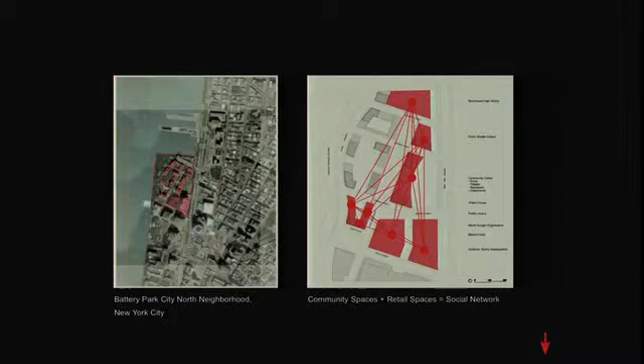which we refer to as woven fabric. This is a project that we designed in conversation with the clients to consciously change the way that we conceive parks in the city of New York from being part of a grid to being a woven fabric that moved through space. We also looked at the effect of renewable energy resources on design at Battery Park City.

We decided to design the North Neighborhood as a sustainable energy network. The decision was taken early on that we would apply every known sustainable technology that was in existence to every building, every park, and every sidewalk that we put into the neighborhood.

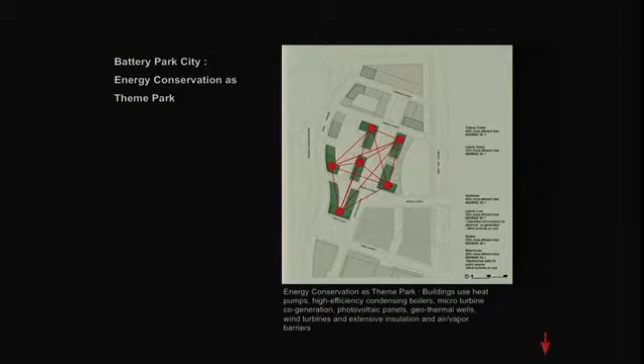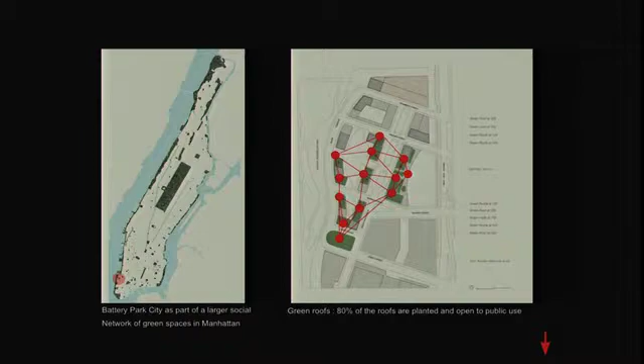I'm showing a map of Manhattan that shows all of the green spaces in the parks, and the little red dot is the North Neighborhood. Next to that, I'm showing a diagram of Battery Park City, which shows where the green roofs are that we put in the North Neighborhood. This is a diagram isometric that we drew that shows all of the various green roofs at Battery Park City in relationship to the massing of the buildings next to a parks diagram.

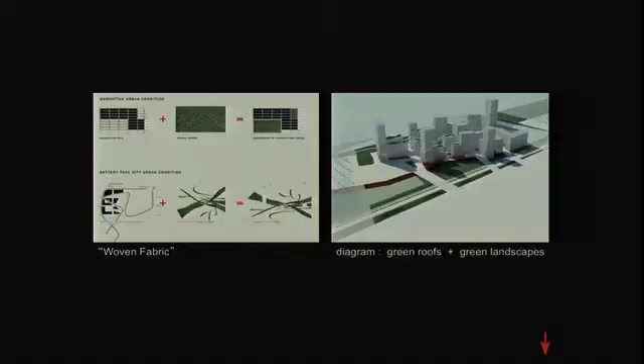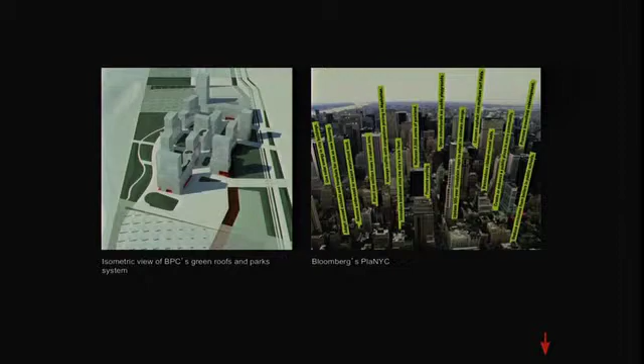This is a diagram by the PlaNYC people. Bloomberg actually came to Battery Park City and met with us and reviewed with us the various kinds of changes that we were making to parks and other systems, and wanted to apply those same sorts of systems to the city of New York. So you can see in the diagram, green streets, the kinds of flowing park systems are all part of the PlaNYC.

Another part of PlaNYC is to plant 1 million trees in the 5 boroughs of Manhattan, and also to bring green streets to New York. This is Battery Park City's North End Avenue, one of our streets, which is a green street.

Another change that I see happening in architecture is globalization. I'm showing the Irish Hunger Memorial, which is at Battery Park City's North Neighborhood. This is a project that was built after HMA wrote a competition brief, which was put out to artists around the world. Brian Tolle won the competition, and his idea was to transplant a piece of the Irish landscape to Manhattan.

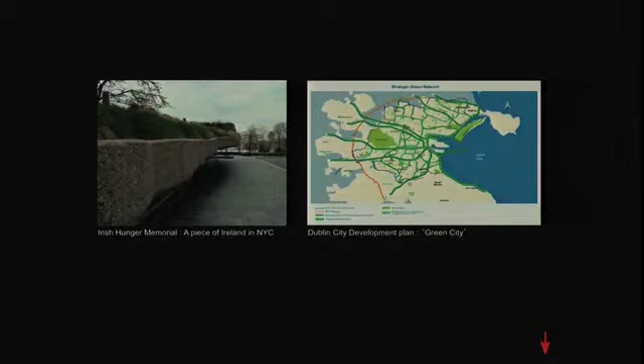Next to that, I'm showing a plan of Dublin. The city planners in Dublin actually came to Battery Park City and met with us to talk about the different kinds of green technologies we were applying there, to develop their plan for the future of the city of Dublin. So this is what I mean by globalization, this incredible rapid exchange that's happening.

Weather, I think, is an enormous driver of change. When you look at weather and global warming, it's been really pushing all of these green movements forward. I think it's being fed by the incredible changes we're all experiencing related to human occupation, deforestation, and carbon footprint.

Plus, very much like Gail Collins, whenever I give a lecture and talk about things, I always talk about Vitruvius, very much the same way that she brings up Mitt Romney's dog.

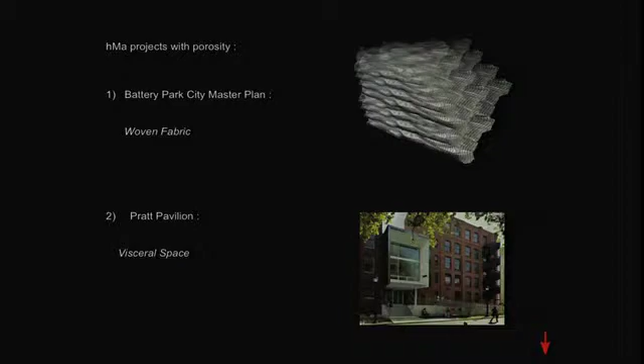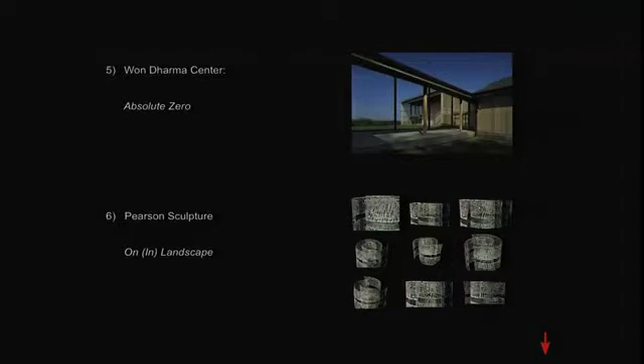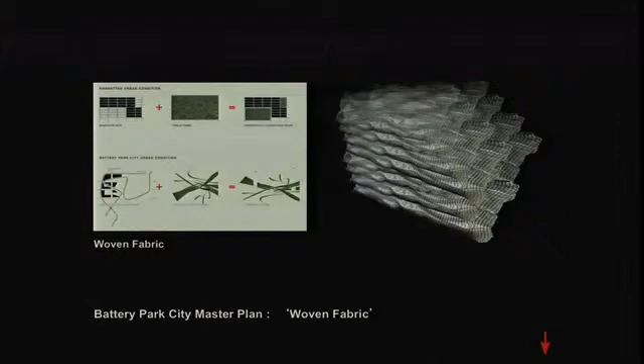So we'll go back to the Battery Park City Master Plan, where we created this woven fabric diagram. This is really where we started with the client, with this discussion of changing the concept of what a city park is and how it should operate within the city.

The way Battery Park City happened is that when the World Trade Centers were originally constructed in the 60s, there was a lot of earth and debris from where they dug up for the foundations. So the city decided to take that debris and put it into an area of piers across the street from the World Trade Center towers, and that landfill area became Battery Park City.

When we pitched to get the job at Battery Park City, there was another architect who was a master plan architect, but he had never made a physical model for the client. And this is how we got this job—we made a model. So I think you should all think about that for your future.

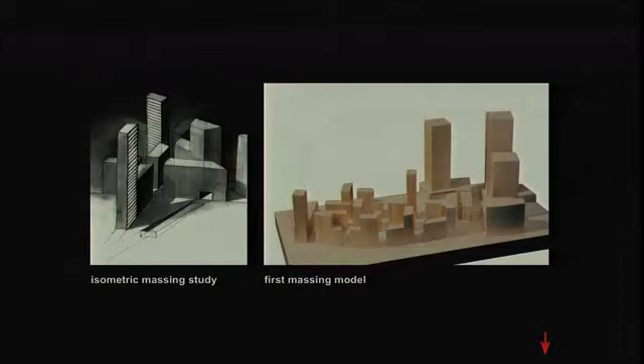This is our green roofs and green landscapes diagram. The red line you see going through the plan is North End Avenue, which is the organizational spine of the landscape down there. As you go down the street from north to south, you go through a series of parks. You start at a dog park at the north end of North End Avenue, then come to the ball field terrace, which is a green roof over the building we're doing at DWIP. Next to DWIP is a field of green, which is the ball fields.

Then across from us is Teardrop Park. South end of North End Avenue is the Irish Hunger Memorial. And west of that is Nelson Rockefeller Park.

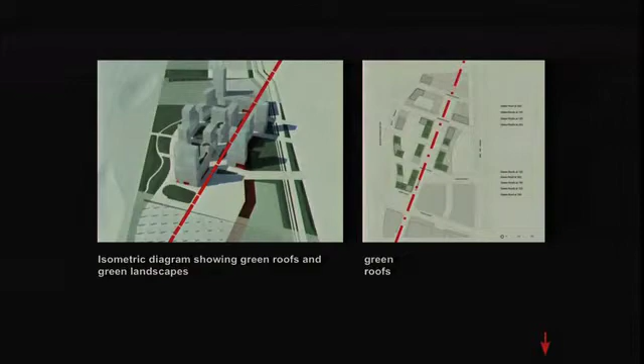So this, again, talks about how we looked at it as a weave. It shows some of our park spaces. And here we are looking at North End Avenue as a green street.

I've talked quite a bit with students here about green streets. Green streets is very much like LEED. If you design a green street, there's a whole application process you go through. And if your street is certified as a green street, you actually get a little plaque that goes on your street, just like you do for a LEED certified building. It's an actual designation of a certain level of green qualities, a certain amount of water retention that your street possesses.

Parks that we have at Battery Park City—this is Nelson Rockefeller Park. It is the west side of the North neighborhood along the river. The Irish Hunger Memorial shows the Irish landscape looking inside the memorial.

This is Teardrop Park. This is a park that we collaborated on with Michael Van Valkenburgh, and the concept was to recreate an original Manhattan landscape by bringing massive rocks to New York City from upstate New York. This is a bird's eye view that gives you a sense of how lush and green it is.

This is a drinking fountain. Everything in the park was custom designed. This is another bird's eye view. Another thing we worked on for Teardrop was, because it's very much an enclosed park with towers all around it, we put three heliostats on the roof of one of the buildings so they could move through the park. They're on timers so that every plant gets enough sunlight to stay healthy.

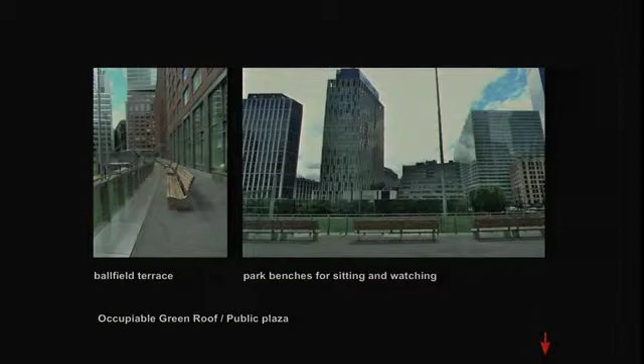This is a bird's eye view of the ball fields and the ball fields terrace. This is actually the green roof of the building that we did, DWIP. It's a series of ramps and staircases and benches that go into the landscape.

And this is the view when you're at Battery Park City's North neighborhood on September 11th, when we had the tribute in light across the street.

So I'm going to change gears and go from Manhattan to Brooklyn. This is a pavilion that we did at Pratt Institute called Visceral Space. It's a deformed rectangular box that we designed to fit between two existing industrial loft buildings, Steuben Hall and Pratt Studios. It also floats between two green spaces, a courtyard that we designed behind the building and the campus in front. Our original proposal was just to place this very simple deformed rectangular cube in the slot between these two buildings, and there were various issues that came up in the process.

The first issue we faced was one I'm going to call 'buildings face out, not in.' When the Pratt campus was started, the area you see in the middle of the campus, the campus green, didn't exist. There was actually a street that ran through the campus, and there was a trolley on that street, so all the buildings were originally designed to face the outer streets. About 75 years ago, the Pratt family decided to change that to actually make a campus, but they didn't change the way people entered the buildings at that time. So this was the first step in making that change, so that people entered the buildings from the campus side.

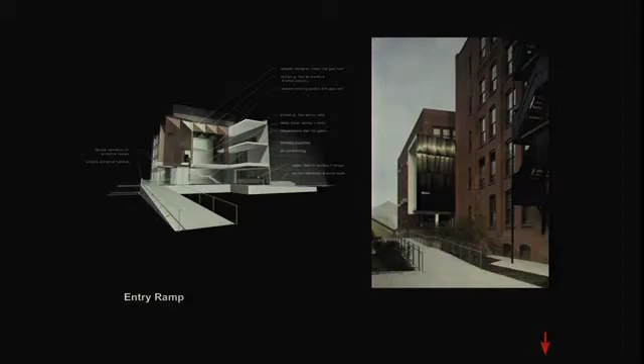Another issue was the handicap ramp, which is usually a problem for architects because they're so long. But in this case, we decided we really wanted that length, because we thought we'd use that really long white concrete ramp to underline our pavilion and help pop it out.

We also wanted to make a really nice public entry. We created this entry where we left the walls from the original buildings in their raw state, unfixed, just as they were, very rough. This shows what the entry is like, and next to that is a slide of what that same space looked like when we started—just the crack between two buildings, with a courtyard that was full of debris.

We also thought it was important to make a nice public staircase. Pratt Institute is a school that prides itself on being a place for people to study things like industrial design and many of the design arts, so we felt it was important to make a stair that was handmade, with a sense of tactility. So we made this steel stair that was hand-welded and created for the space.

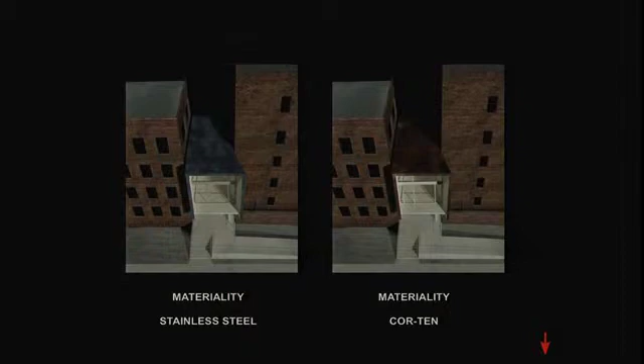We also studied materiality, as we often do with our projects. We definitely wanted the pavilion to be steel, but we didn't know if we wanted Cor-ten or stainless, so we decided at the end of the day to go with stainless steel. We also studied one of the other things we're asking students to do in thesis, which is precedents.

One of the precedents we looked at was this sculpture by Menashe Kadishman, suspended at Storm King Art Center in upstate New York, because we wanted to get that sense of tension you feel when standing under a weighted object. Another precedent, which happened after the fact, is this piece by Michael Heizer in Los Angeles, his Levitated Mass.

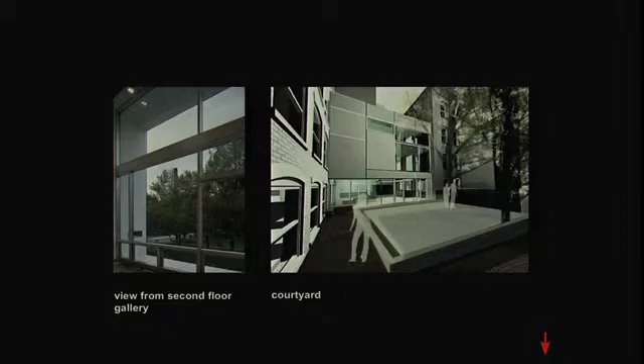There are also the other two edges to the space. There's a campus green on one side, and a courtyard on the other. So when you're in the gallery, you can always look out and see the campus, and behind you there's this courtyard that we designed. This is a perspective rendering of the courtyard, and this shows the campus and what our courtyard ended up looking like, always giving you a way of looking at the campus or the courtyard to know where you are in the building.

This is my last slide of Pratt. Just to give a sense of what it's like to stand under that box and look up at the sky, so you sense this building as a complete object or vessel, which we thought was important for Pratt Institute—that you pass beneath this visceral vessel, crafted with a certain sense of care, like a beautiful machine.

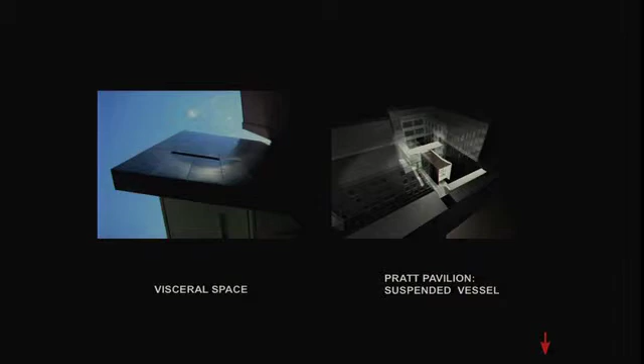So I want to switch gears and talk about a residential project. This is actually the only residential project we've done in the past few years. It's Holley Loft. This is a client we had originally designed the loft for in 1996. It was selected for a show at MoMA called the Un-Private House. Two years ago, we demolished the project and did another renovation of the space. The client felt he needed to move on, and I kind of agree.

It's an interesting difference—the original space cost $90 a square foot, and it was put together by friends of mine. The new space cost about $800 a square foot. So it was pretty much a white space.

I wanted to create these two wood boxes that gave you orientation, so you entered into the smaller box, which is the elevator lobby, and across from that was another wood box, which was a study. For me, these were kind of like this violin I'm showing by Robert Lazzarini, a New York artist, floating on the white wall of a museum—it becomes this object that gives a sense of materiality within a white space.

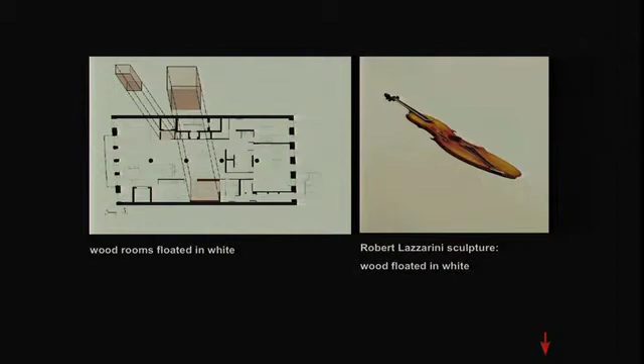These are sketches I gave the client as we went through the process, talking to him about how I wanted these two boxes. What you'll notice in the photographs is that I don't have great shots of this space, unfortunately, because we didn't want to shoot it once the furniture went in—the furniture is, quite frankly, horrible. So I apologize, but what I have are shots showing it unfurnished.

This is the living room space, looking back toward the bedrooms. This looks at that entry elevator lobby, and another view looking at the lobby. I wanted to crack that space so you got a sense of the wood from the living room. As you can see, we put in a whole new concrete floor.

This is standing in the study, looking back at the elevator. And this is inside the study—all the walls are wood, the ceiling is wood, looking back toward the living room.

In addition to the two wood boxes, there are also these three glass boxes, which for me were a little bit like this ice wall by Michael Van Valkenburgh at Radcliffe—you had these three glass boxes that you had to walk through to get from the living space to the bedroom space.

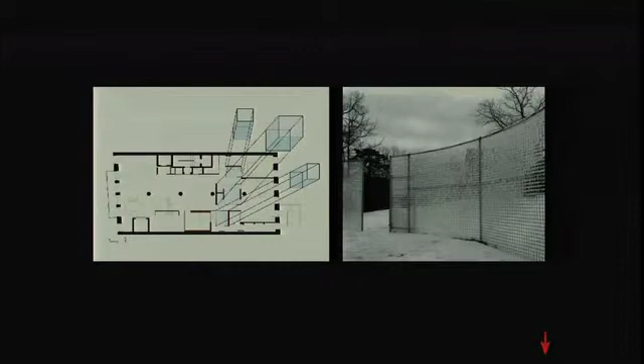So this is what it looks like when you're in the living room and you look back at the private spaces through those glass boxes. And this is the view you get in the bedroom looking back at the living space.

For me, the glass boxes were kind of like this anamorphic box. I designed this anamorphic box for a friend of mine, Michael Schumacher, a composer I've collaborated with for about 15 years. I feel Michael's sound pieces are very flattened pieces of music, so I felt this anamorphic cube, which is very flattened, was very appropriate for his music.

Next to that is a shot of one of the bathrooms. And this is back in the living room space, looking at the bedroom area, the kitchen, the living room, looking at the study, standing in the master bath looking at the master bedroom, and in the bedroom looking toward the living room and the bedroom. This is in the master bath and in the bedroom.

This is a shot I think is very interesting - standing in the master bedroom, looking back toward the study, because the door to the study is kind of like the anamorphic box. It has two ways of being: when it's open, it's solid wood, and when it's shut, it's completely white. So it has two faces and two ways of being.

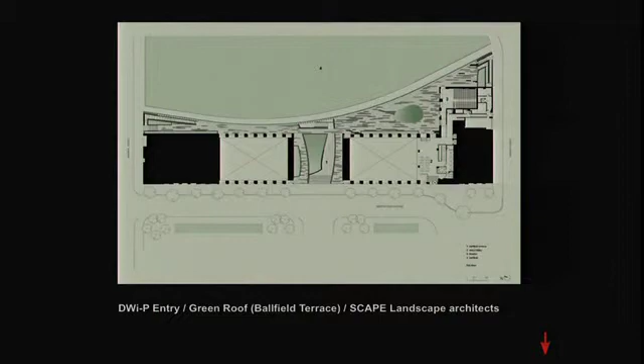The design process again - we make a lot of physical models. This is a physical model we made, and we also make a lot of rendered drawings, partly for our clients so they know what we're doing, and also partly for ourselves.

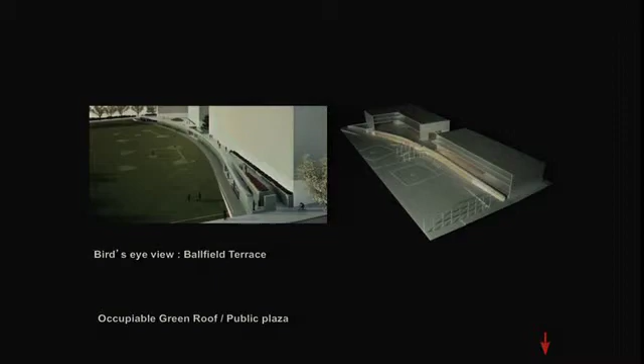This is what it's like to enter our ball field terrace roof from the ball field, from Teardrop Park. You can see the materials are this blue-green granite on the base of the buildings, which are not ours, these high-rise buildings. The paving on the ground was bluestone from upstate New York, and there's a lot of green, so there's a sense of blue-greenness to the space.

The roof is also very porous, with a lot of stairs and ramps connecting you to all the other parks in the North neighborhood. So from every edge and from the center, you can go down and out from the roof. There's also benches where you can sit and watch what's going on in the ball fields.

View from Warren to the terrace, the north side of the ramp at Warren Street. And the stair up from the south side gives you a sense of what the glass is like - it has a frit pattern embedded in it, which is a piece by Michael Schumacher.

Here's a ramp at Murray Street taking you up to the roof. This is the entry lobby, and from the entry lobby you could look down on the pool. There's an Olympic-sized pool - the community center is going to be run by a group called Asphalt Green, who are very famous for their swimming program.

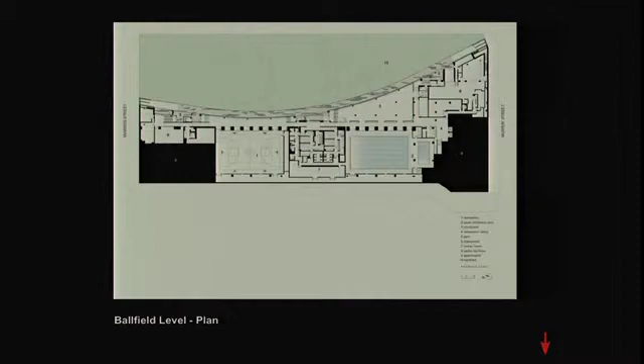This is the lower level plan where you can see the pool room, the gymnasium. There's a fitness center against the glass. There's two ballet studios. And this is a stair that connects the upper lobby to a lower lobby. This is a lower level lobby.

The desks that are in the public realm are faced with bluestone. This is actually the fitness room, looking out through the glass. It now has a lot of fitness equipment in it.

This is the pool, the gymnasium, standing in one of the dance studios looking out toward the ball fields. And this is the glass wall.

For me, the building really has three main parts. It has the green roof. It has the program that goes on inside itself, which is a community center. And then there's the glass wall.

This is really something that Michael Schumacher and I spent five years working on, talking about, and arguing about. And this is kind of where we started, which was - I felt that we had at this building this incredibly long wall. It was 550 feet long. And it was basically just a storefront, a very nice storefront system, but a storefront.

So my feeling was that we needed to put something into the wall that was more than just glass and more than just putting a frit so that we protected from the sun. So what I really started with was Marcel Duchamp's Large Glass, because this is a piece of glass which is just a normal industrial window with a narrative going on inside it.

So I think that sort of digital interactivity is a sort of interesting aspect of where buildings are now and where buildings could be going. And I think that this is something that architects really need to grab hold of, or somebody else will.

And this is where I started with Michael. This is the first collaboration that he and I did. It was a piece called Architects Design Music, which was a piece called The Light Score.

And I've always been fascinated by water. This is a piece I designed called the Waterfall Table.

This was done because I was contacted by a group called Dune Furniture, and they sponsored a competition for different designers to design pieces of furniture to be featured at the International Contemporary Furniture Fair in New York. I was selected, and so they now produce this furniture, and you can have one of these tables for $16,000 if you want one.

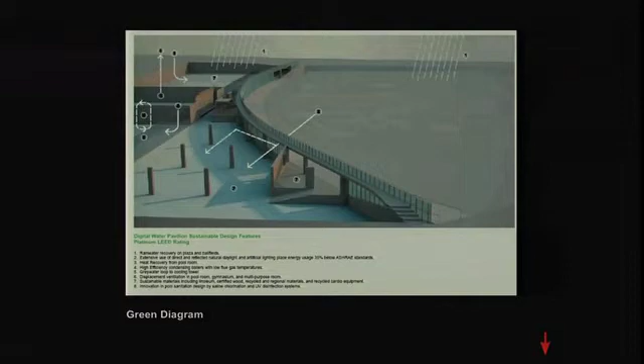This is another project which is kind of similar to DWIP in that it's a community center, but it's in a very rural place as opposed to being in the city.

This is a project that I'm going to call Absolute Zero. It's a 700-acre site in Claverack, New York, for the Won Buddhist sect. They wanted to do a meditation retreat.

They were from Korea, and the first thing that we did in starting the project was take a trip with them to Korea to look at precedents.

And the building that really shone and stuck out for us as a great precedent were these little, very humble Korean farmhouses, because we thought they had a very beautiful roof form and we liked the way they made a spiral. So that became our prototype for how we made all the residential buildings in the project.

And we also looked at other prototypes. We looked at Robert Smithson's spiral jetty and Michael Van Valkenburgh's tidal pool.

And then for the meditation hall, we looked at this precedent, which is David von Schlegell's sculpture at Storm King, which is this floating rectangle in the landscape, because we felt that that made a really good space for meditation in a place of stasis.

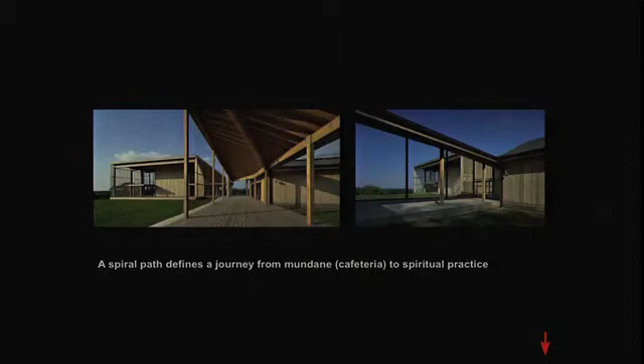And then as you're walking through the administration, you'll see that the roof is kind of broken into these fractals as you come to the end of it. So you have this dynamic path to walk to get to the meditation hall.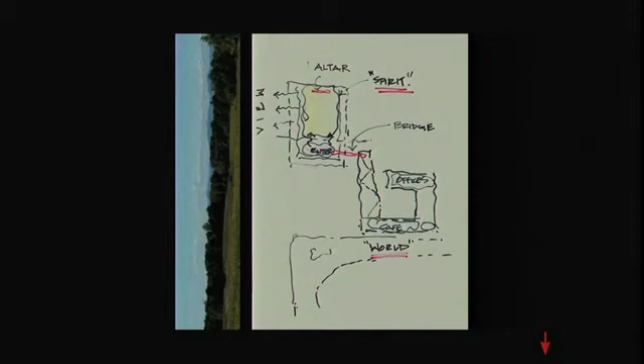And then there's a kind of bridge that takes you over to the meditation space, which takes you into the space of the spirit. So this kind of shows those pieces of that porch that you walk on, the kind of cord bridge that takes you into the space of the spirit.

These are diagrams that I drew for the project. I always make these diagrams. I find them very helpful, and I encourage my students to do the same. These really talk about the way in which we thought through the circulation of the buildings.

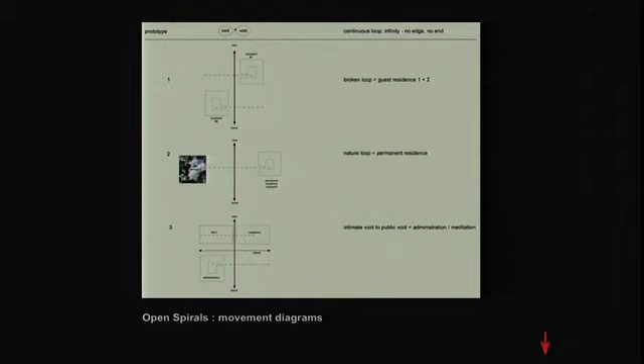There would be these two guest residences, 1 and 2, which would be like a broken loop that you could go through. There would be this nature loop where the permanent residents, the monks who lived at the site, would be able to walk up to this clearing in the woods to meditate. And the third loop would be from the administration hall to the meditation hall.

A dynamic connection through the site paths is a diagram that we made during the design process.

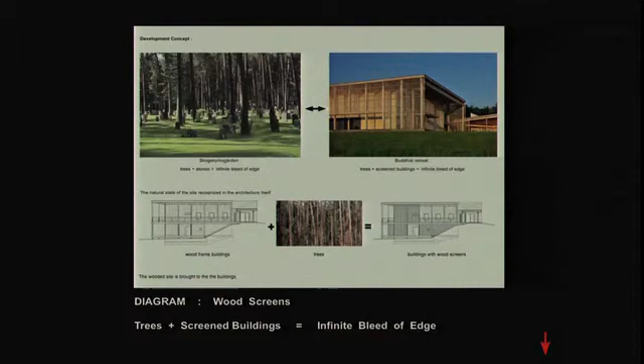This is another diagram that I made, which is of the wood screens that we put on the face of the buildings. This is a diagram where we looked at how there are a lot of trees on the site, and that if you put the trees literally on the buildings, you would have this condition where you would have an infinite bleed of edge, because by putting the sense of trees on the face of the buildings, they would blend with the landscape.

So when you look at the buildings and you look at the landscape at the site, you can kind of see there's a oneness about it. And that will increase over time because these photographs of the buildings were taken right after we finished construction. They're going to turn dark gray, so they'll be very connected to the trees.

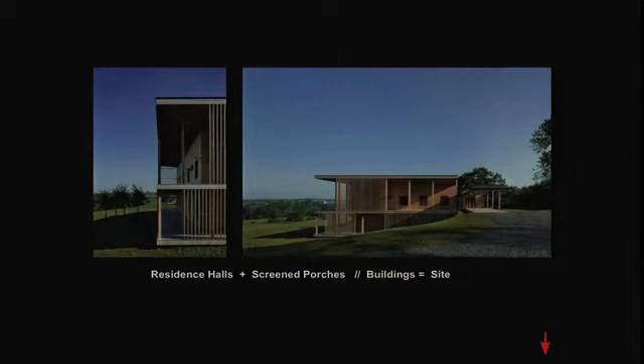This shows the residence halls with their screen porches, views of the residence halls and the screens, and looking back toward meditation from the residences, and a view of the residence halls with some of the landscape on the site. This is inside one of the monks' rooms. We made them very simple with materials from the site.

And another one of my green diagrams, which shows the technologies that we use to make the site really green. We have a whole solar panel field to supply all the electricity for the site. We have five geothermal wells, a central biomass boiler.

The monks are going to only use trees that have already fallen to create heat. They have solar hot water panels on all the roofs, and we also mitigated the area around the buildings and put in organic soil, so those will become organic meadows.

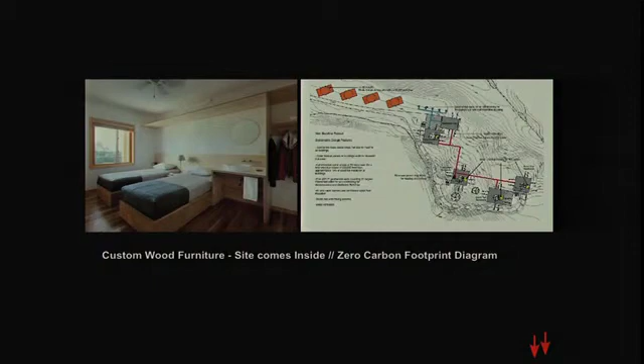Changing gears again, New York art friend Bruce Pearson is a painter, and we've known each other for a long time. Bruce is part of a group of artists who I have collaborated with and worked with over the years. His paintings all have text in them. I can't read the text ever, even though he's a good friend of mine, but that painting that you see has something written in it, and maybe someone here can see it.

But we did a collaboration called Text in Landscape. Bruce sent me a text, which he crafted, which contains real hard-won insight, and said, I don't know what you're going to do with this, but he wants to get out of the surface of the painting and into a landscape condition of sculpture.

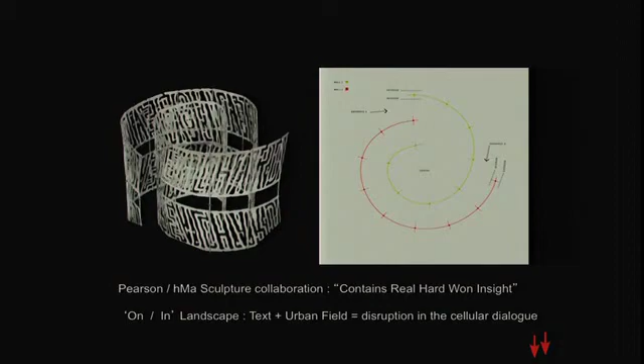So I said, okay. I had a mirror core drilled with diamond plate drills, and created this little maquette to create this sculpture that people would walk through, so that you would walk in and be within the text. We're thinking that the sculpture would be about 8 feet high with a sort of baked enamel finish.

And this shows the maquette from various locations. We even talked about possibly sliding it so it's actually over water so that he can get this reflection of the text.

And for the future, I see this sort of continuation of this notion of landscape merging with buildings.

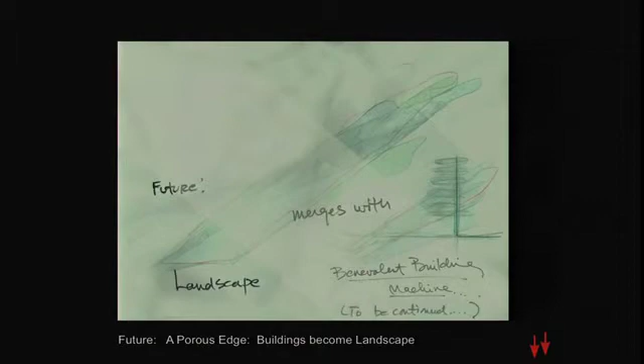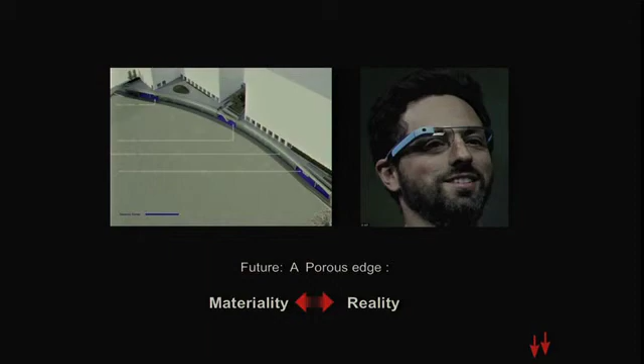I also see a continuing push of this porous edge idea, that the materiality and reality of building is going to be conditioned by new technologies, which are both digital and biological. I think architects are going to probably be getting on board with making buildings with skins that are much more interactive.

For HMA research, I did write a book in 2006, Designing with Light, and I'm showing the light score here, which is the piece that was performed at the Kitchen. I'm currently working on a book while I'm here this year called Shape of Sound. I've worked on several buildings over the years which deal with sound as the focus of the design, and I'm going to be cataloging those works in my book.

So that's what I have to show you. Thank you all for coming, and please, if you have questions, feel free to ask. Thank you.

of design. Well, we changed the front door, because we sat down with the administration and did a master plan. When the current president took over, the buildings on the campus had not had any work done to them for over 100 years, and most of the buildings had to be entered through loading docks. It was pretty grubby.